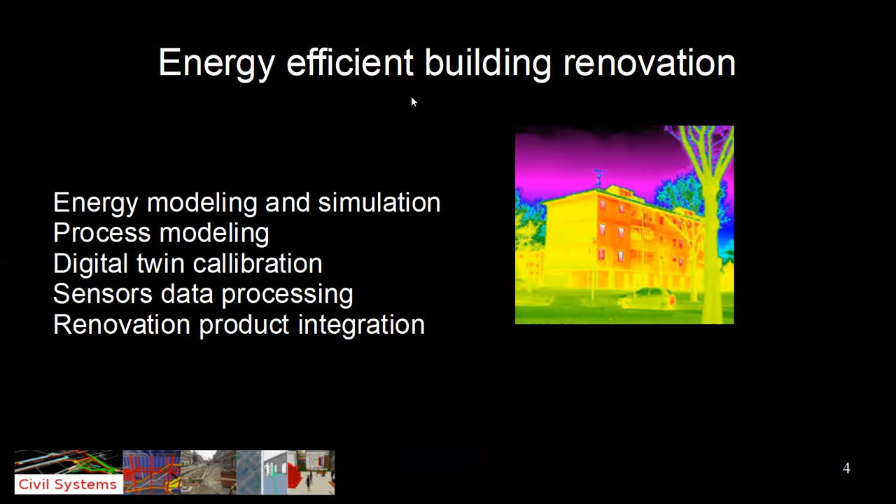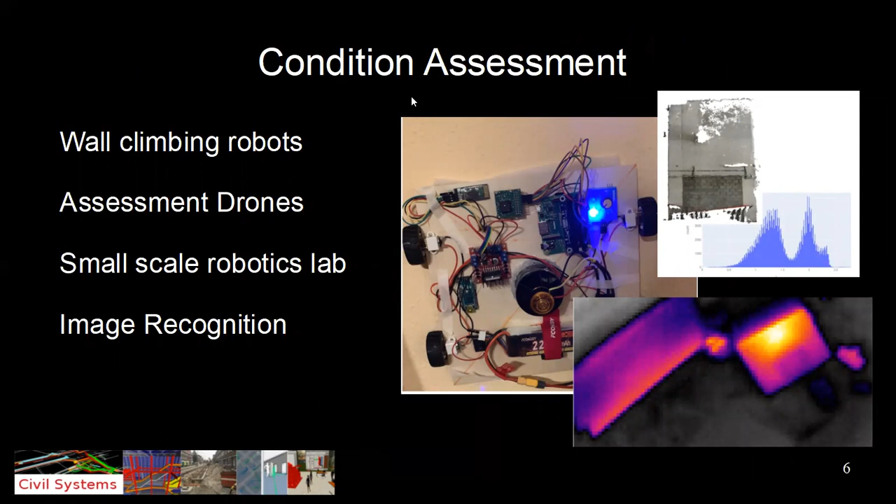One is energy efficient building renovation. I'm not going to focus too much on these, just giving you a little bit of background where I come from. We also work on asset management infrastructure and condition assessments. We even have a PhD student who builds wall climbing robots. We have a small scale robotics lab that we built up for image recognition work.

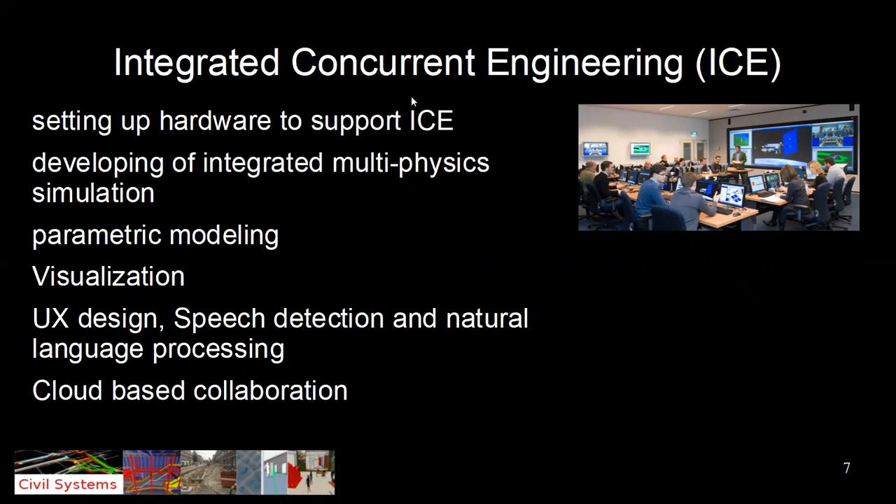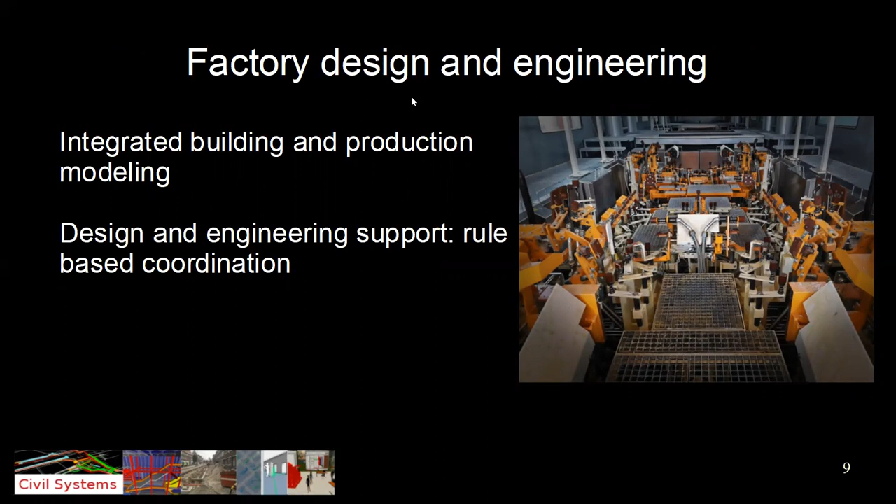One of our key research areas is what we call integrated concurrent, or also collaborative, engineering, ICE. Digital twins - we look into digital twins for the construction site, but also for buildings, for energy simulation and so forth. We have projects in factory design and engineering, working for example with Volkswagen. And then lately we did win a large European project looking at the circular economy for the built environment.

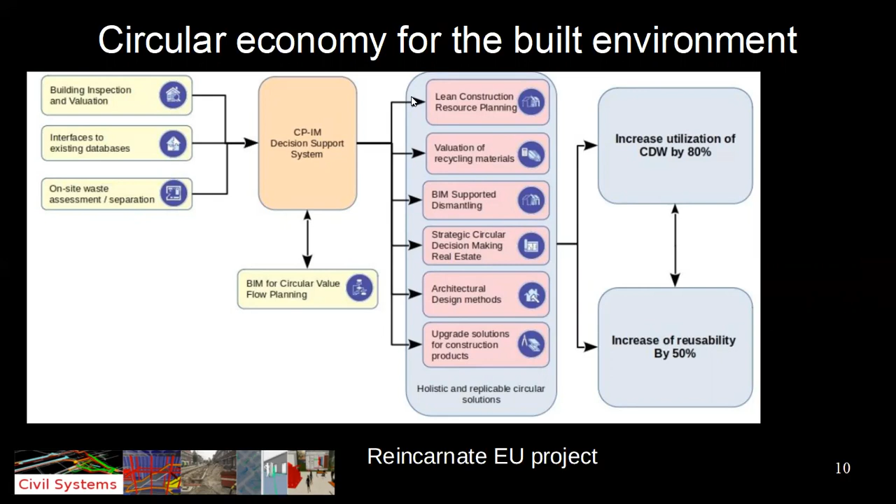And then something maybe a little bit for the future - we are also starting to look at space station engineering, not yet really funded, but we believe that civil engineers should also be integrated in that. We know how these things should work, right?

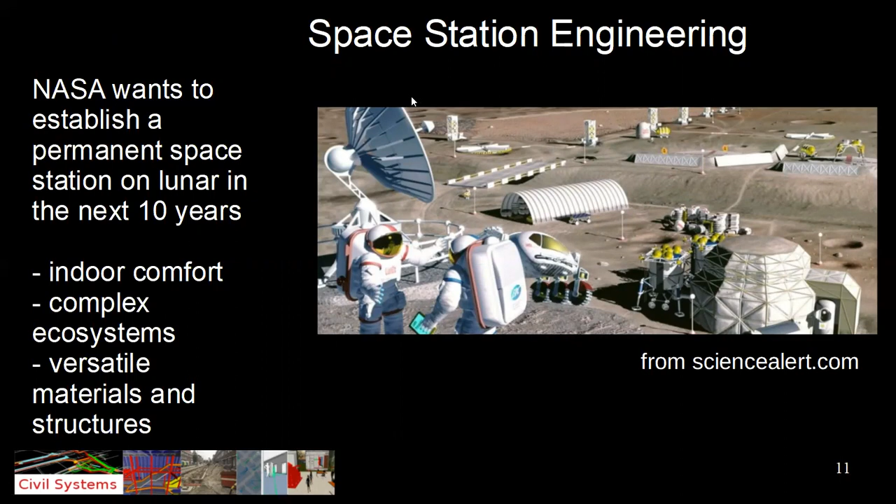And now coming to the serious part of the presentation, the things that keep me or us up at night is kind of this. I read a lot of science fiction, and one of my favorite books is 2312 by Kim Stanley Robinson. In this book, there's a passage where a historian in the future, in 2312, looks back, right? And what historians do, they talk about epochs, right - Stone Age and Iron Age and whatever. And she describes the epoch that we are living in now.

She calls it the dithering, which is from 2005 to 2060, basically from the end of the postmodern to the fall into crisis. Charlotte, who's the historian, derives the start of this epoch from the UN announcement of climate change in 2005, which I find always shocking to hear, which is why I repeat it all the time. Charlotte says these were wasted years. Then the next epoch after that was the crisis, which she calls the crisis, 2060 to 2130.

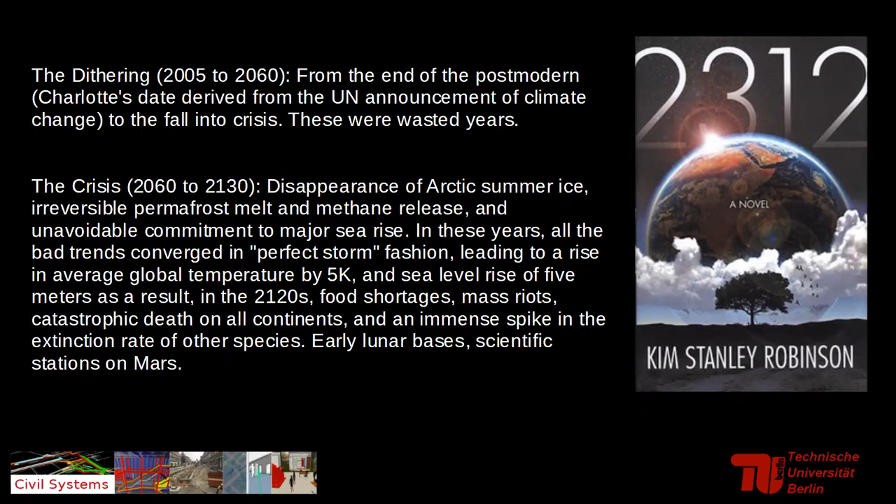Disappearance of Arctic summer ice, irreversible permafrost melt and methane release, unavoidable commitment to major sea rise. In the perfect storm fashion: average global temperature up by 5K, sea level rise by 5 meters, food shortages, mass riots, catastrophic deaths on all continents, immense spike in the extinction rate of other species, and then bringing it back to space - early lunar bases, scientific stations on Mars as well.

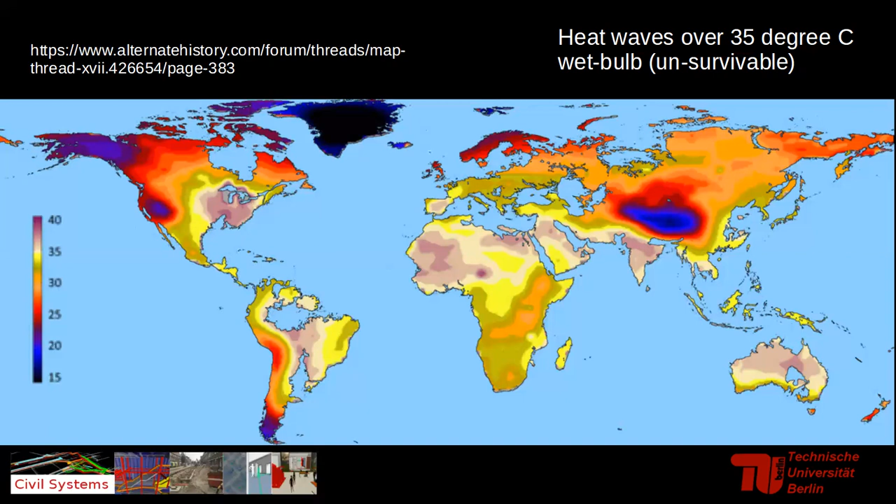This is also from an old report - not the most recent IPCC report - but actually what each of these reports shows is that the previous predictions predicted things to go much slower, and everything actually goes much faster than we thought.

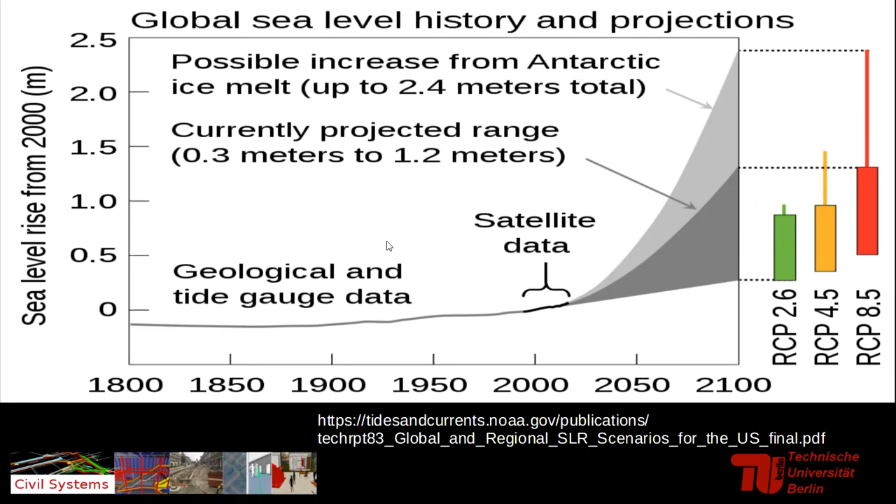So what will be one of the things that we, as I call it, not civil engineers but natural and built environment engineers, need to do in the years to come? We probably will be very busy with increasing the resilience of places - be it protection against water, be it protection against heat, so that people can continue living.

Now, looking at this, how are we doing today on our projects when we look at large engineering projects? This is a nice case study that we were able to follow in the Netherlands - it's the Dakpark, called the roof park. It's a major flood defense, multifunctional flood defense project in the city of Rotterdam. The Netherlands - Rotterdam, Amsterdam, they call it the Randstad - is one of the most densely populated areas in all developed countries, and they built this flood defense in the middle of a city.

It's still one of the lighthouse projects in Europe. Last year, I read a newspaper article about this project as one of the lighthouse projects in Europe for how you should build flood defenses, in a German newspaper. And we don't like the Dutch so much.

When we looked at this project and were able to follow it, something struck me back then, and it motivated a lot of the work we do now.

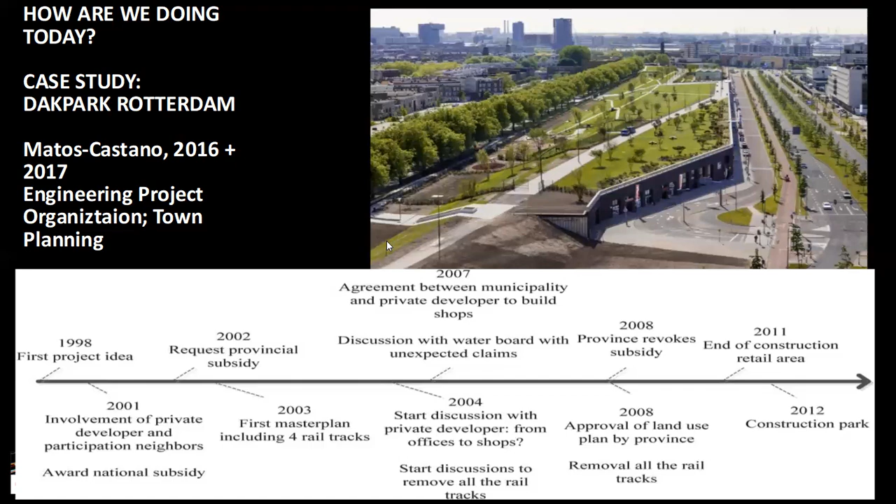From the first project idea in '98, when the city of Rotterdam realized they needed to reinforce the dike because it was getting too dangerous, till the construction in 2012, that's 14 years. Looking at all the predictions, the question is, do we have 14 years to really create the resilience we need? I don't think this is a special project, I think this is a project that went very well, a lighthouse project. So 14 years is more the norm, and we probably have a lot of projects that take a lot longer.

Another thing that worries me, I'll put it provocatively, are we our best customer? When we look at who's causing climate change, probably civil and built environment engineering is responsible for more than 50%.

So we not only need to create resilience, and we need to become much, much quicker to do so, but we also need to save resources. We are the engineers mainly responsible to save resources, to mitigate at least the speed, but hopefully also the magnitude, of the climate change effects we're expecting.

This is a nice picture from the Circularity Gap report in 2020 that shows where the resources go. Every year we extract 92 gigatons, we only recycle 8.6 gigatons. We emit 14.6 gigatons, and if we look at housing, 38.8 gigatons of extracted materials goes into building new houses.

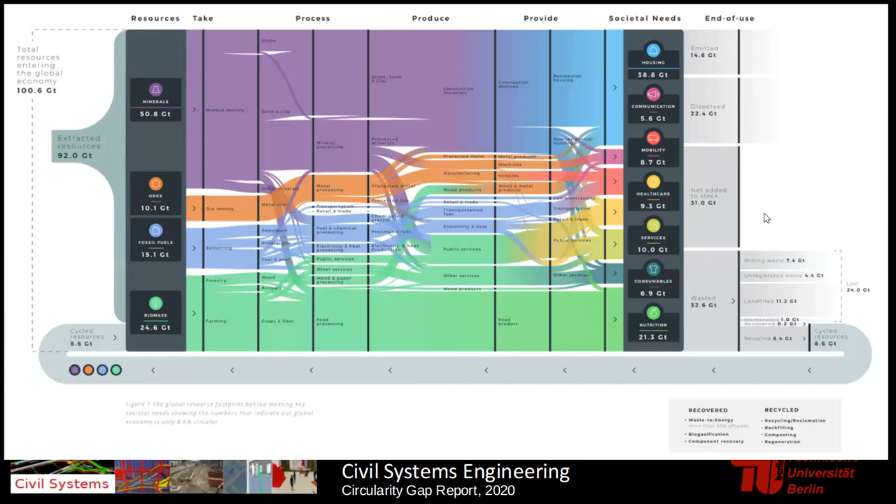A big research question that follows from this, which we have at the Civil Systems Engineering Department, is how will engineers have to design, build, and maintain the natural and built environment? How do we deal with the systemic complexity and the life cycle focus we need to develop? How do we integrate the social and technical innovations?

I think the social part is very important. I like this English term, civil engineering, that speaks to it: we create engineering solutions for civil society. More than all other engineering disciplines, we need to integrate and look at the social, and how to move the social forward in relation with our products. We probably need to involve specialists from many different areas, and we also need to take care of public participation.

The engineers, who were men back then, were designing something, had some calculations or equations to solve, and then gave it to the computing department, where the computers were actually humans still calculating. There's a really cool book if you're more interested, it talks really nicely about this: Calculating Stars, the story of one of these computers who becomes an astronaut.

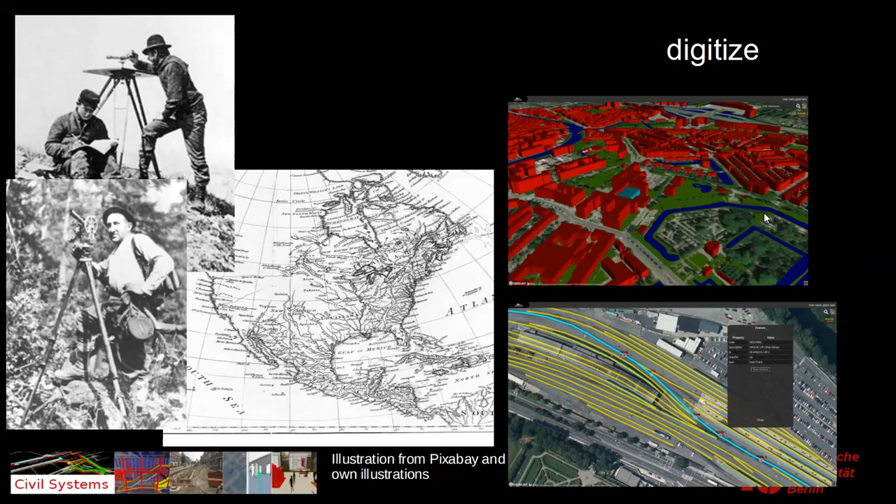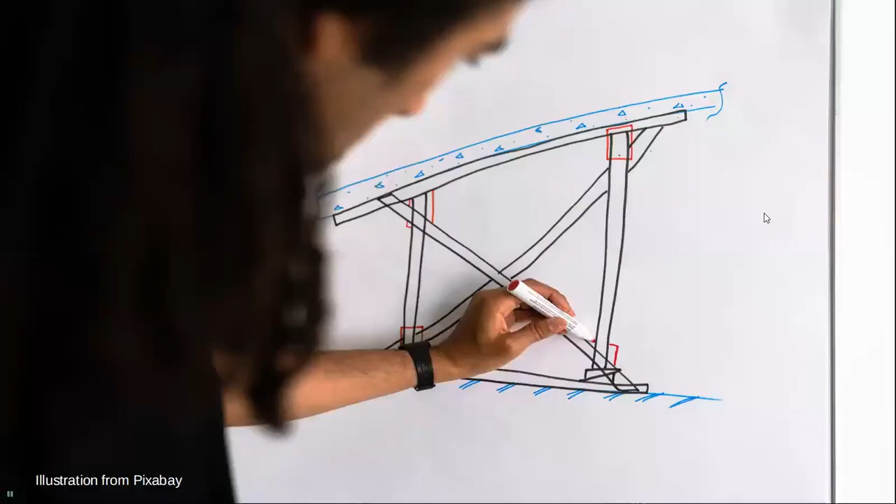The second mind shift that we believe needs to happen when you want to work with computers has a lot to do with how we approach the design process. This is a picture on the left-hand side, an Arup sketch I got somewhere, I don't even remember. But this sketch is really nice because it depicts how engineers have worked for, I don't know, 5,000 years. They first create a sketch of how the thing should look like.

That's here in black. And then in the second go, they start thinking about the logic of this, and what actually is it that we need to design, what is it we need to engineer - the roof height, the height of the structure, the cantilever, and the depth of the truss.

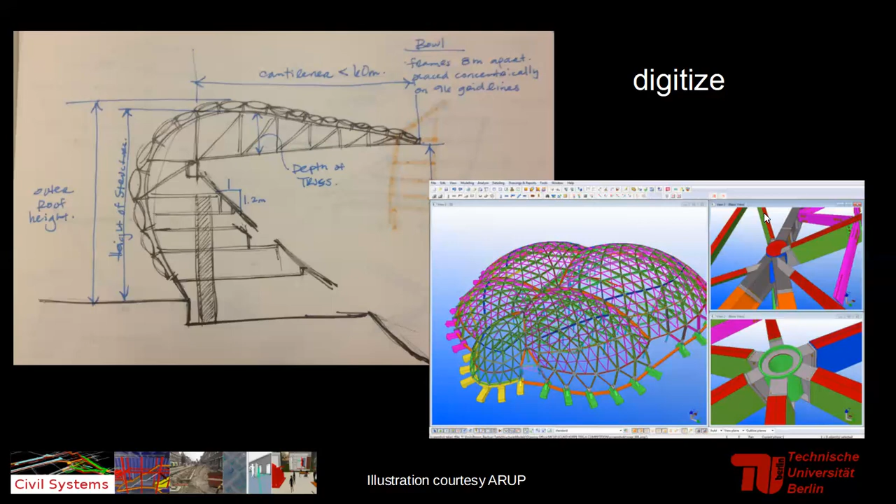And now we've digitized that practice with our BIM tools and 3D model tools, but the process is still the same: we first draw the geometry, how does this thing look like, and then we think about the logic behind it. To really leverage the computer, I believe we need to turn this around.

So maybe engineers in the future will need to start the engineering process by trying to understand what the design problem is and how to formalize the design problem and the structure of the design problem, instead of jumping directly to engineering solutions, and get much more skilled in that process, because then they can use the computer to automatically generate these solutions for them.

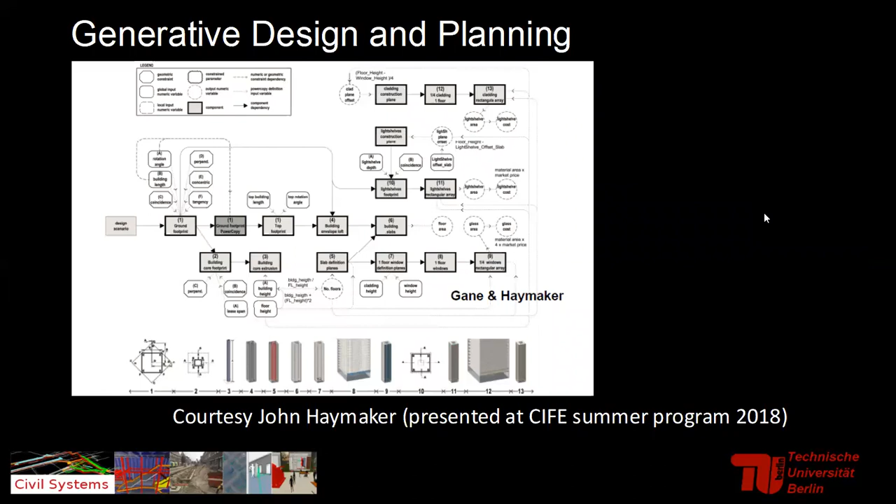And then they might again deal with visualizations where every point is just one design option. They can really not only compare maybe 3 options, like on the good projects we have today, but most of the time we just come up with one. But then really coming up with options that help us find optimal solutions, solutions that really lead to more sustainable buildings, and maybe also do things much, much faster with this approach.

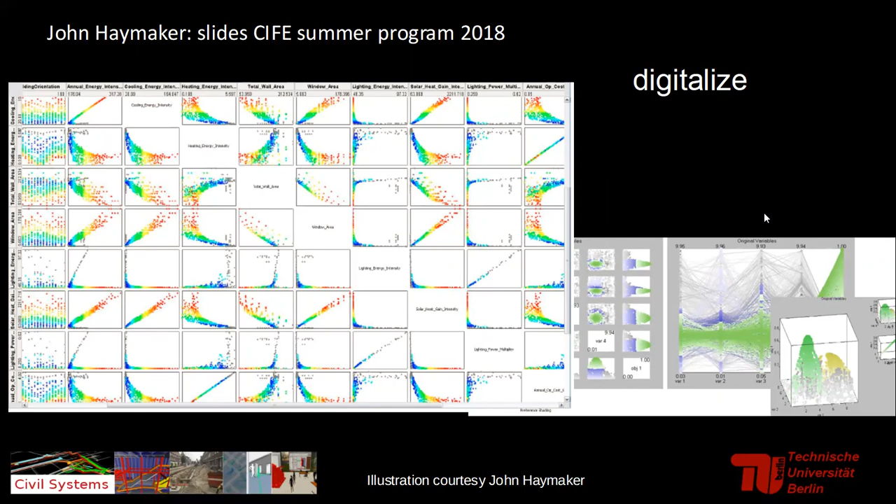So with these two mind shifts, what does the next generation of civil engineers need to know? Just provocative, but just putting this out here in this talk. One important aspect is systems engineering. Of course, I wouldn't say anything else because I'm chairing the systems engineering department. But leading to this, I called these provocations for this talk, because I said I'm gonna be provocative.

So leading to the first provocation: the fundamentals of civil and built environment engineering have changed, so we need to change how we teach. We need to stop teaching analytical methods and teach numerical methods. We need to stop teaching deterministic methods and start teaching more stochastic methods.

And because we have the computer, and the computer provides a really great tool and toy for education, we need to move from paper-based toy problems, also in our tests and assignments in civil engineering, to computer-supported, more realistic projects. And that all supports the change that we need to have.

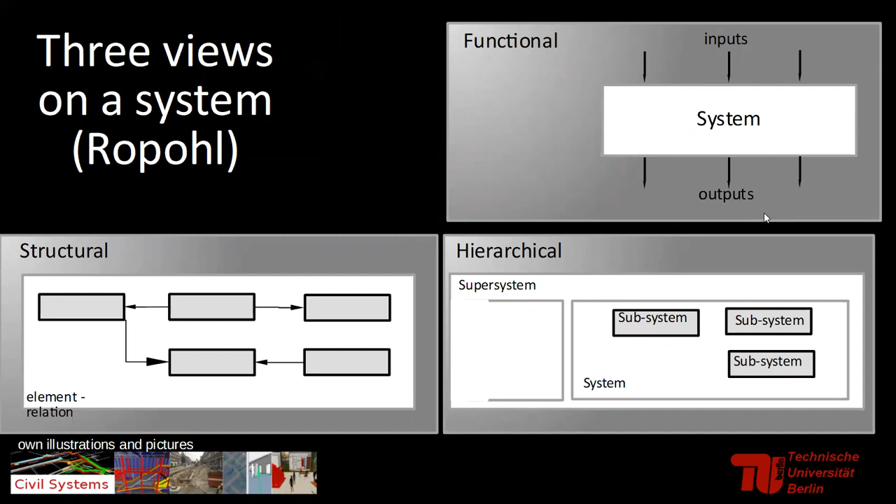A couple of basics that we teach: students need to understand systems. We teach this through three different views on the system: there's a functional view, a structural view, and a hierarchical view. The structural view is what we traditionally do in engineering, like creating partial differential equations, but we don't try to solve them analytically any longer.

Instead we try to understand how the physical world behaves in relation to the predicted products we want to put into the world. Our students probably need to understand this on a much deeper basis again, and also integrate these models. We see here structural integration, building physics integration, and so forth, to come to integrated designs.

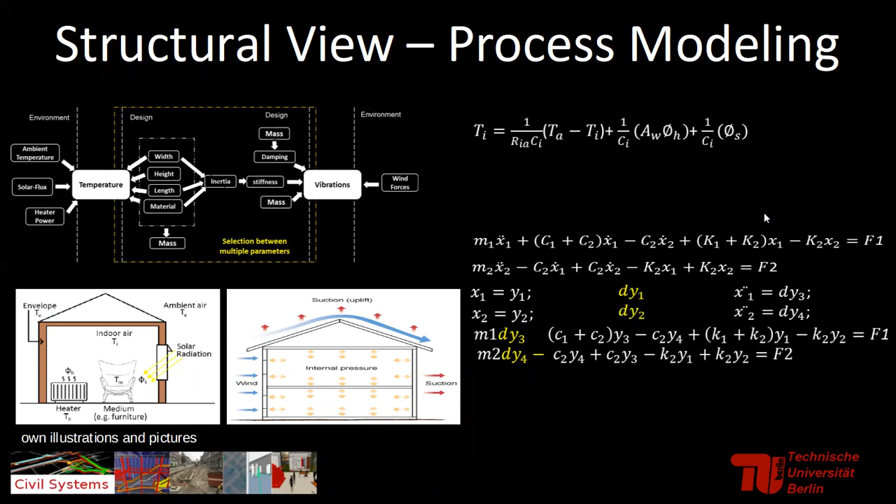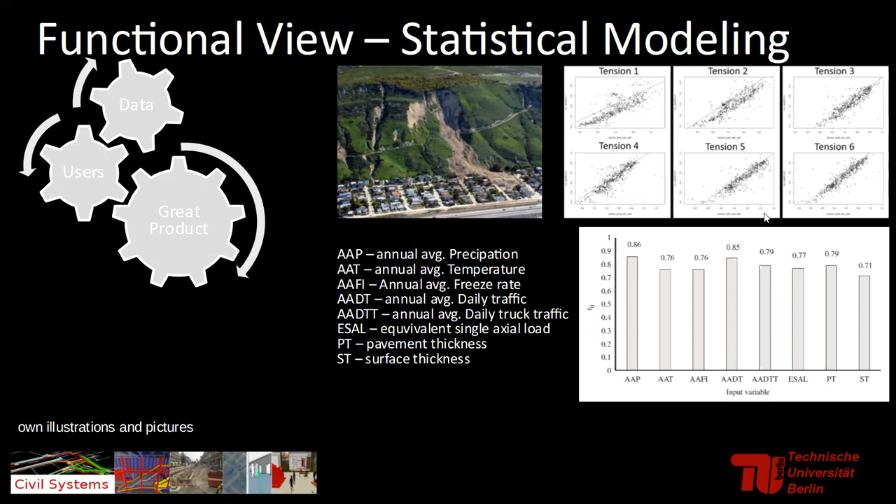Then the functional view is basically where we have an input and directly go to the output, so we don't want to understand what's inside the system. That's the statistical modeling approaches, the machine learning, the AI in that sense, that we need to teach much more.

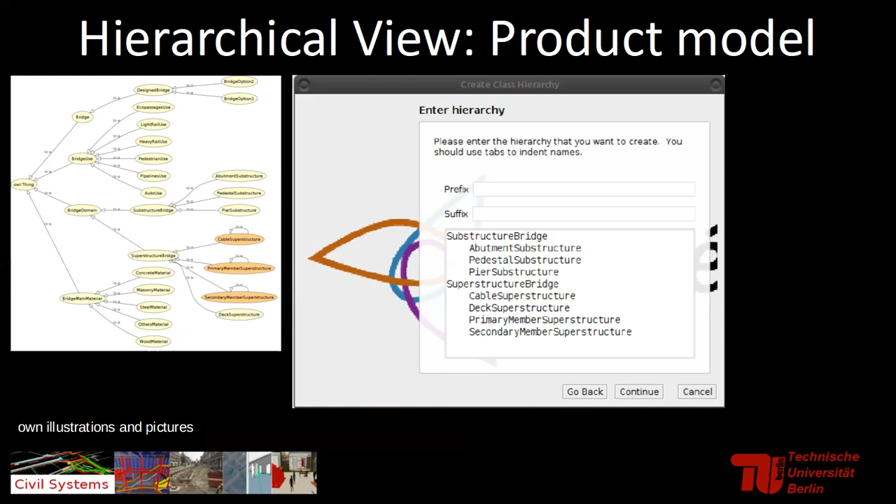And then there's a hierarchical view, because all of this needs to be done on different scales of our systems, from large scale, maybe urban planning or national planning, all the way down to designing single products that go into our buildings and systems. So we need to understand this hierarchical view too. And of course the structural and functional views can be applied at each level of the hierarchy.

And then engineers need to start thinking about the combination. Can we develop parametric models where we can join structural views with functional views and so forth, to get to results?

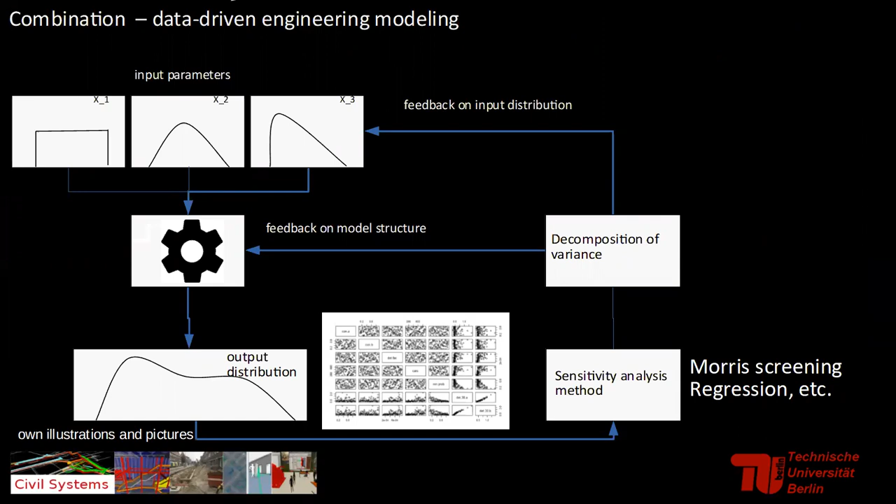To start thinking about data-driven engineering modeling, where we have input parameters, we develop functional models that simulate something, we get output distributions, we analyze the sensitivity of the output to the input, and improve our models again. This is an overview I created once for a paper.

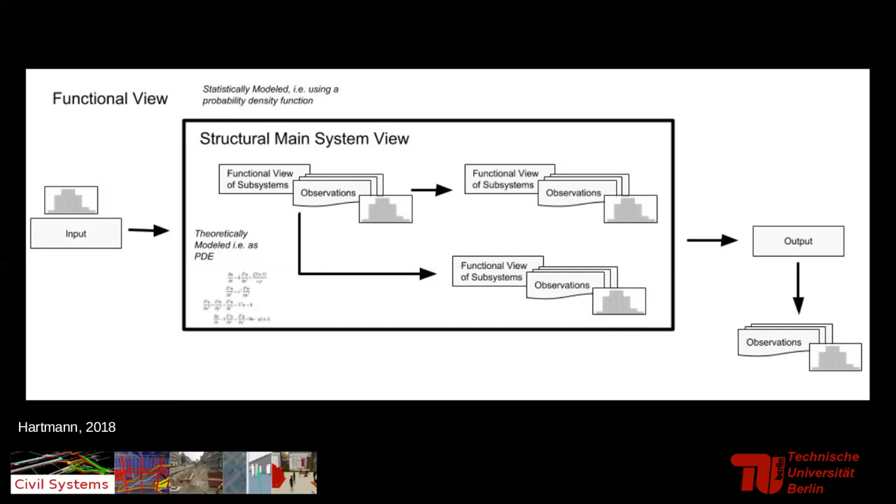It kind of shows the input-output relationship across different structural levels, in relation to the engineering tools we have at hand. We try to teach this much more explicitly in our International Master's of Civil Systems Engineering. I'm not sure what happens here at UW, but I believe we need to make this much more explicit to our students, so they can really understand the engineering design process on a much higher level than they do now.

One of the other important skills we see is that engineering students need to be able to deal with the design space, like moving from problem formulations to alternative generations and experimentation. That's a skill they need to have, and I think we can teach it at universities. We do a really bad job at TU Berlin teaching this, and maybe it's something to reflect on - how it goes here or in other places.

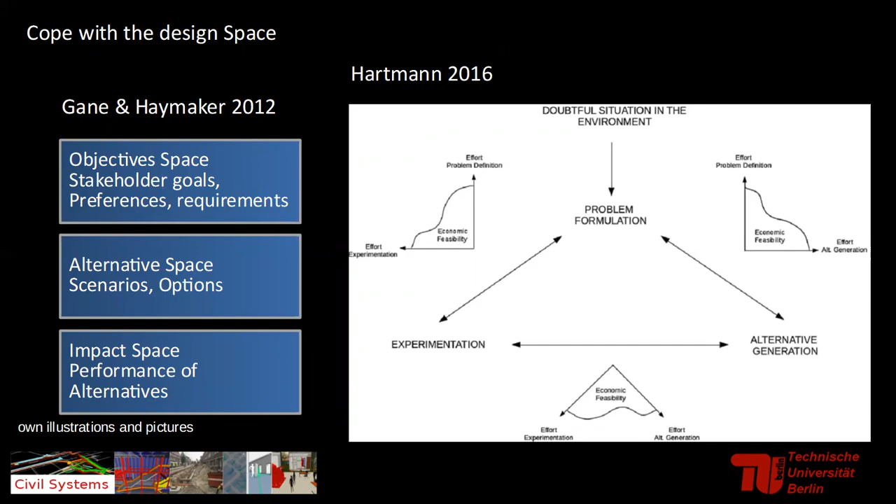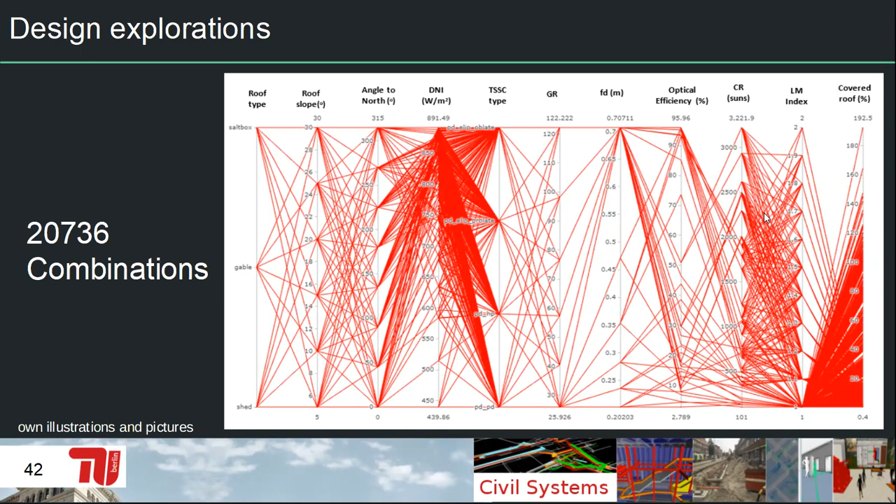When students can do all of this, they might be able to really do large-scale design explorations, design and engineer higher quality systems that we need, and hopefully also do this much quicker.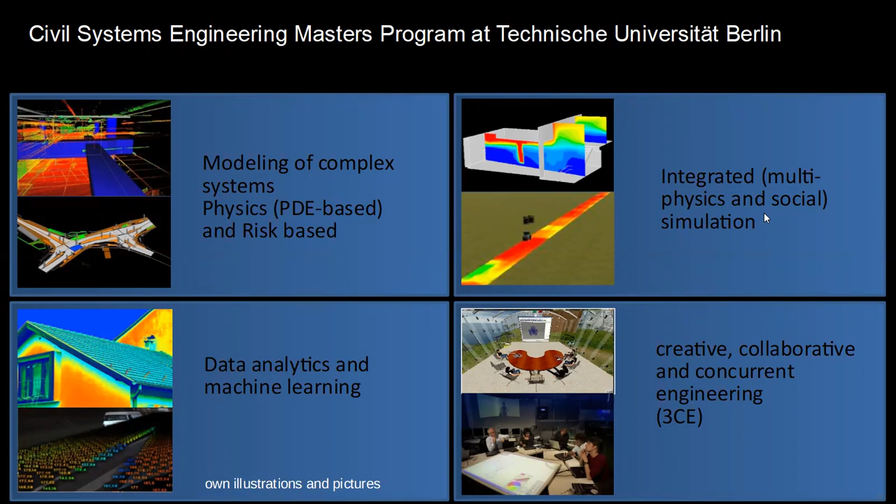This is an overview figure we always show, the four leading areas of the Civil Systems Engineering Master's Program we designed at TU Berlin. All our students need to really understand how to model complex systems, not only in the product modeling, BIM modeling sense, but also physics-based, partial differential equation-based modeling and risk-based modeling approaches. They need to learn how to integrate different models, not only multi-physics models but also the social ones. They need a good foundation in data analytics and machine learning to deal with the large amount of available data we have. And all of these three areas really need to lead to creative, collaborative, and concurrent engineering. This is the basic philosophy of our master's program.

Moving away from education a little bit to industry - we perceive that we are in a very tight race in industry at the moment, because of course a lot of players and actors are moving also into this direction.

We were working with Arcadis for quite some time to shape their digital strategy. One of the great things was done by Julian, who was a genius leading that effort. One of the first things he did was go to the board of directors at Arcadis and give everybody a sheet of paper with two questions to answer individually, no discussion: how much business do you think you will lose with digitalization and digitization, and how quick? They asked each individually and then averaged the numbers. Each individual means - there's also the chief financial officer sitting there, very conservative, who doesn't believe in computers.

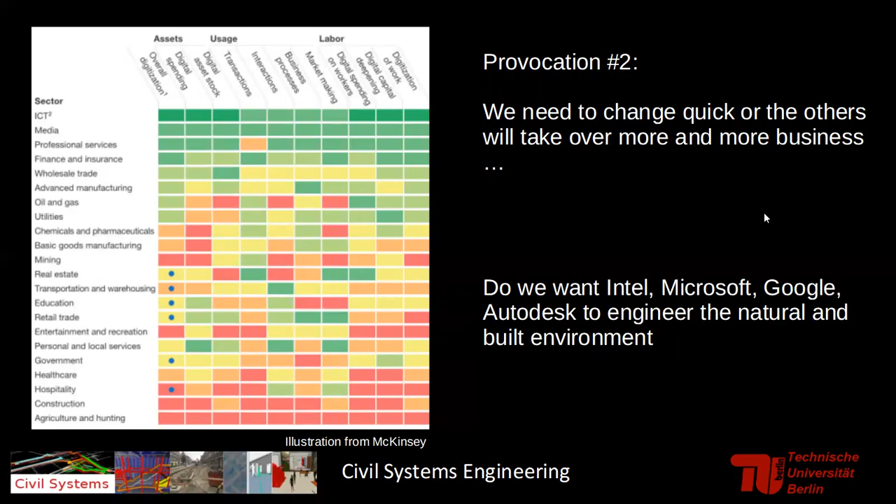And that also means changing how we teach fairly quickly, right? A couple of words at the end about science and research.

My provocation number 3: civil engineering research is not relevant, as we do not understand well enough how engineers creatively develop innovative solutions. That's something I strongly believe, that we have a huge detachment in a lot of the research we do. I'm chief editor of Advanced Engineering Informatics, one of the journals in the field focused on computational solutions, and a lot of the work is not relevant.

What we want to do in this journal is report progress in the engineering discipline of applying methods of engineering informatics. We want engineering relevance and to provide the scientific base to make engineering decision-making more reliable, spontaneous, and creative. Demonstrate the science of supporting knowledge-intensive engineering tasks with computational solutions. Validate the generality, power, and scalability, be explicit in representation and use of knowledge—that's very important for our research—and use examples of automating and supporting knowledge-intensive tasks in artifact-centered engineering.

That's all what we want to achieve. But when we look at the publications, it's really just baby steps in all of these. I believe these points are what we should strive toward in engineering research, not only when it comes to computation, but in most of the research we do in civil engineering, which is developing new design and engineering methods, now using computers to do them. We also do some product design which makes an impact. But if you're working on methods, these are points to reflect on whether we're really doing this well in our research, and my claim is no, we don't do it at the moment.

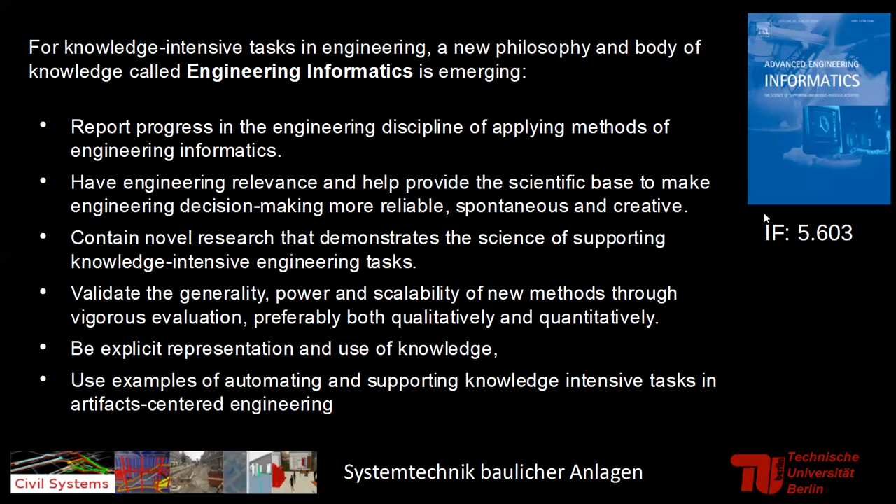The big research questions we have at Advanced Engineering Informatics, and at our department, are: how can engineering knowledge be formalized using computational modeling methods? Not our knowledge as researchers and academics, but really the knowledge of practicing engineers, of experienced engineers. How can we formalize that? And how can we really come to a science? Science means providing evidence, doing data-based collection to answer this research question.

So how can computational models support complex engineering work? Not just developing a new model and saying, hey, I'm a super smart academic and this model is the best in the world—that's not really scientific. It's really asking, what is the knowledge that this method formalizes? Is that really top-of-the-edge engineering knowledge from practice, and then showing that the model also works?

Then the questions come up: what is convincing evidence to answer these two research questions? Because we are scientists, we need to provide evidence for things. It's not just that Timo can say it's good—it should be something not coming from me. How can these questions be answered in general? How can we increase our understanding bit by bit of how computational and non-computational methods can be used beyond single applications?